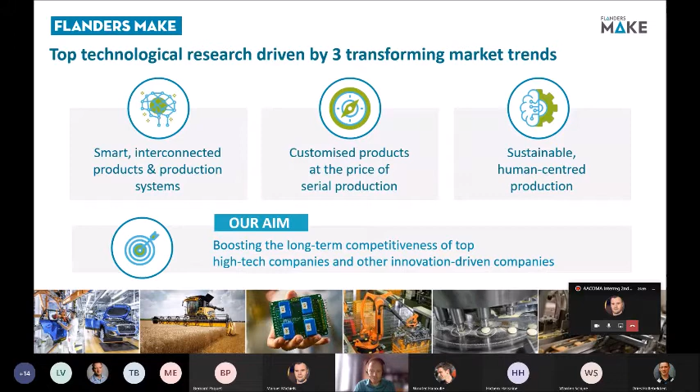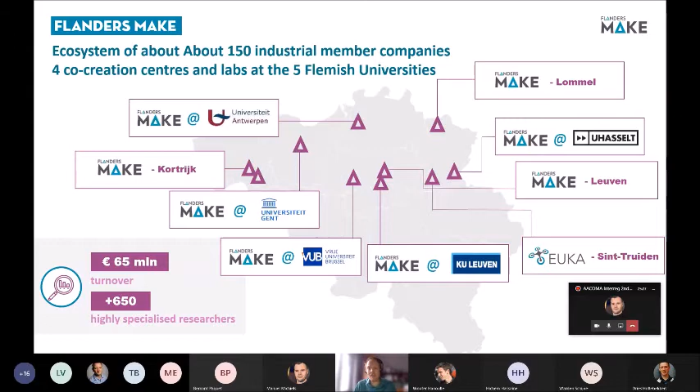The researchers of Flanders Make are about 650 specialized people, spread all over Flanders. We have 4 co-creation sites focused on vehicles, drones, production systems, and machinery. The 5 Flemish universities are associated, meaning certain research groups are strategically aligned with the roadmap of Flanders Make.

Together, we do research in 4 competences. The first is decision and control, to increase intelligence in systems, products and production systems. The second track is design and optimization, to speed up design processes, make them more multidisciplinary, and facilitate an exchange of information in order to cope with complex design problems and product variability.

The third research track is called motion products and has to do with making drivetrain systems, whether they are for vehicles, machines, or flying objects, to make them more energy efficient, more performant, but also more autonomous. And this requires drastic changes in their system architectures.

The last research track is about flexible assembly, in order to facilitate the creation of flexible production systems in which robotics, digitization, automation, and operators go hand in hand to create a flexible environment where easy reconfiguration is facilitated.

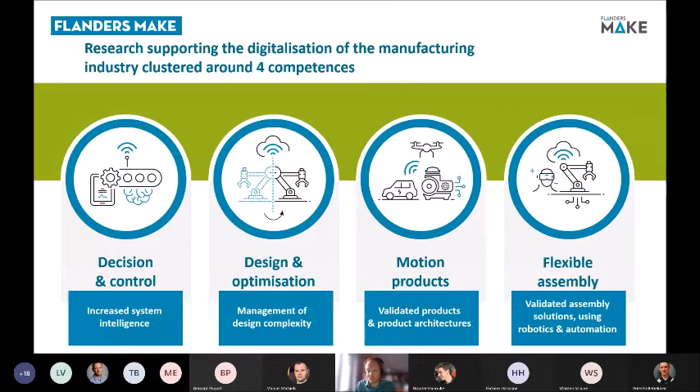Specifically for the AACOMA project, the research team of the circular joining technology is involved. They're working in the joining and materials lab located in Lommel.

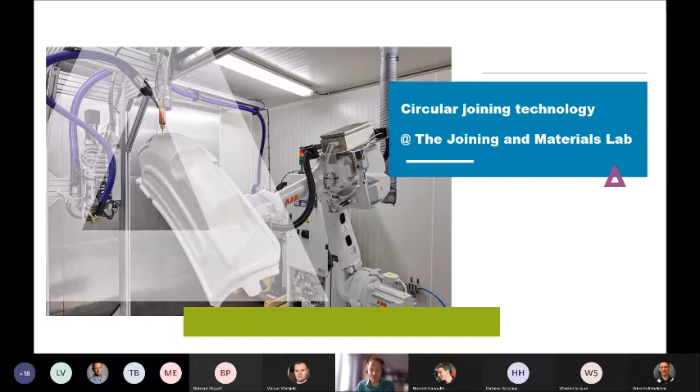So in this lab, we have a set of core competences we are developing. The first one is with respect to the selection and design of joints for multi-material products, where we have expertise in design and selection of adhesives, but also expertise in modeling these systems and evaluating performance.

The second core expertise is to test and validate the designed products and their production systems. Thirdly, in order to make the production systems, we want to deploy Industry 4.0 technologies with respect to automation, robotics, digitization, and to support operators in these production environments.

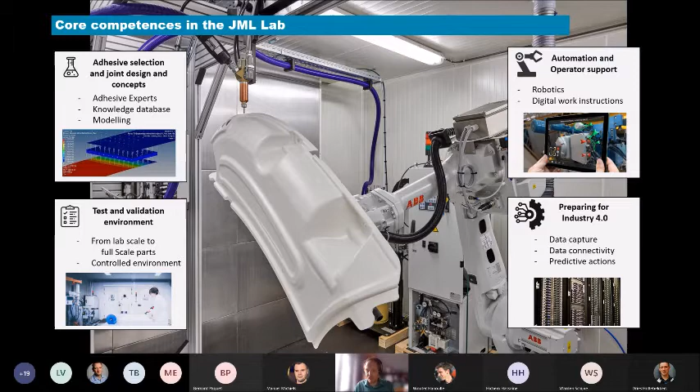And that's then also the fourth expertise: preparing for Industry 4.0. It is capturing data about the product over their entire life cycle, and also during production, to gather these data in a structured way and to deploy them to retrieve predictive actions to improve production settings and to improve the product performances.

The joining and materials infrastructure is unique. It offers the possibility to prototype products, advanced products, multi-material products, and their production systems.

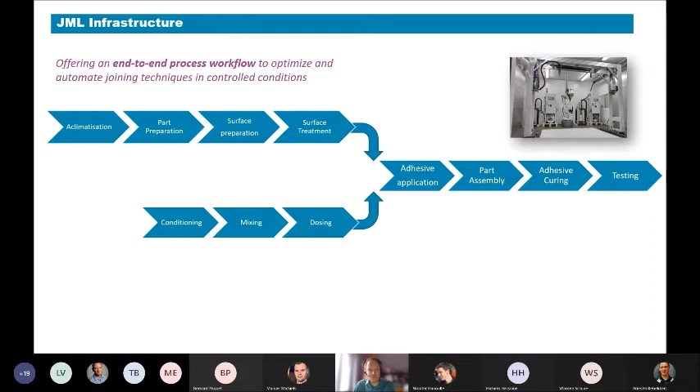So we have equipment that covers the entire production chain of multi-material joint products, going from acclimatization to surface treatments to application of adhesives, curing, and finally the testing. And in this equipment, we deploy, where possible, robots and cobots.

We have dedicated equipment to test the final functionality and performances of a product in climatized conditions and under dynamic conditions. And during this whole process, we capture data in order to monitor product performances and production system performances.

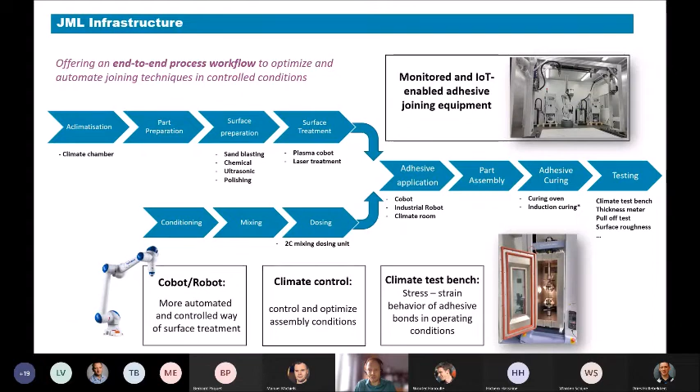In the following video, you will see some examples of activities of our labs towards production and improvement of composite products.

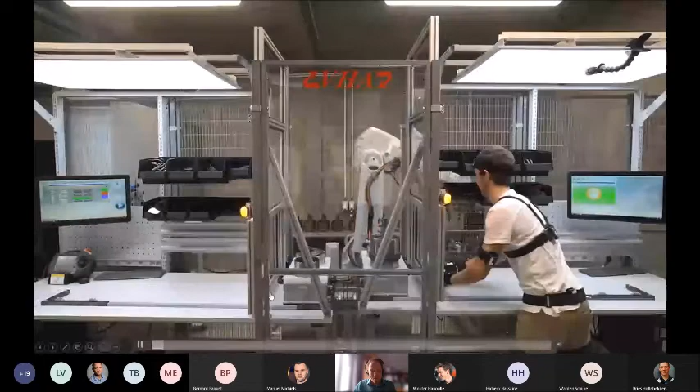Maarten? Yes. The audio is not coming through yet. Okay, a second. Apologies.

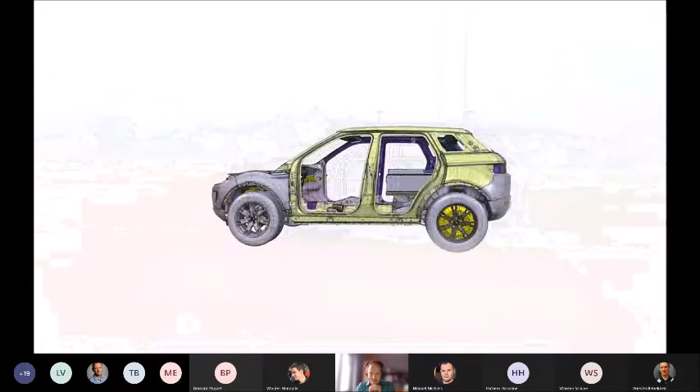Should be better now. Flanders Make is the strategic research center for the manufacturing industry. We look at industrial problems and we analyze them, break them down into engineering practices. We really offer the end-to-end chain from software engineering and modeling all the way into product validation, product testing to help the industry. One of the key research domains is composite materials.

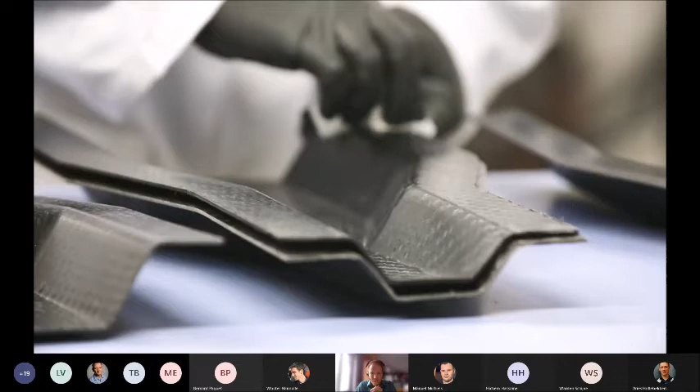Because they offer great stiffness for a low weight ratio, this makes a lot of applications very interesting. Think about fuel efficiency in industries like automotive and aerospace.

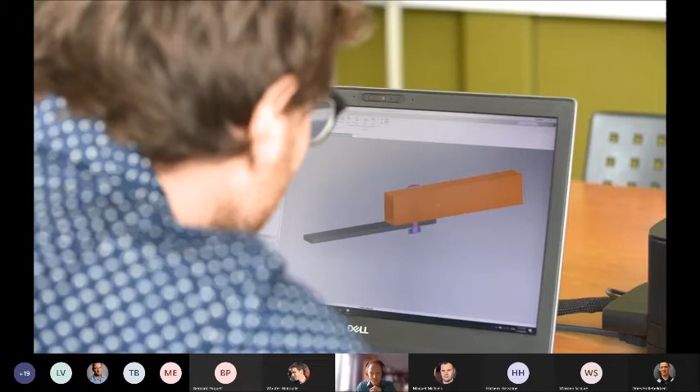After often starting on paper, designs are quickly transformed into computer models. And what we are doing specifically in Flanders Make is try to develop simplified modelings thanks to optimization techniques, and with that getting results in a much lower time frame that are accurate and that can be applied to the full-scale model. For a single joint application that we have tested at a component level, we can reduce the simulation time from 15 minutes to 15 seconds with our methods and our optimization algorithms.

Once a composite part is in production, handling it can prove quite challenging. Machining composites is a complex process because of the nature of composite panels themselves. They are formed by fibers that can easily delaminate. Delamination is a serious threat to quality in the aerospace industry, where large panels need to be joined together.

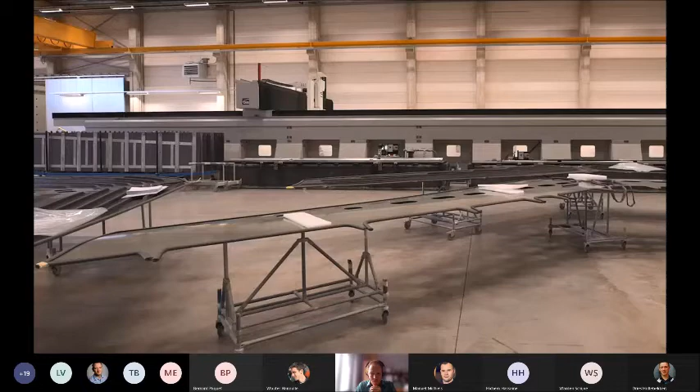We are speaking here about panels that can go in the order of magnitudes of 20 meters long and with 5 millimeter thickness, very thin. Machining this kind of composite panels is very complex because they need to be stabilized. Currently, this requires large and costly fixtures.

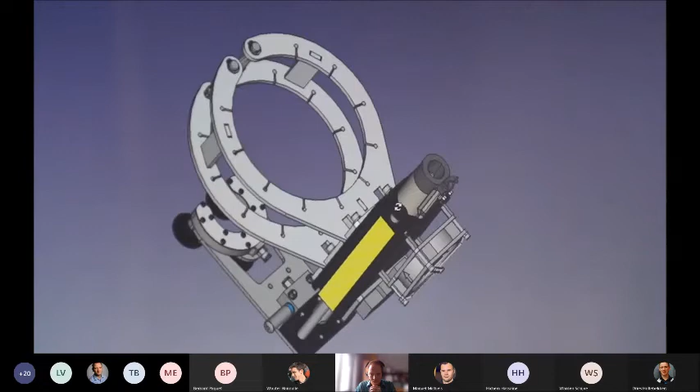Flanders Make has patented a handy add-on solution called Smart Clamp. The results we achieve with Smart Clamp is reduction of delamination. In some applications we reach more than 70% improvement in quality.

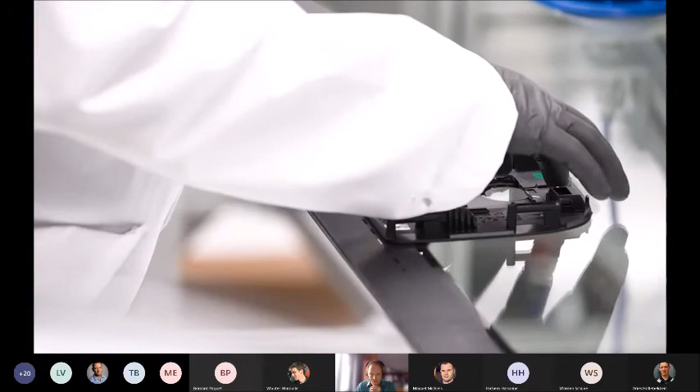Another way of joining composite parts is by using adhesives. Due to their interesting properties, they're able to withstand vibrations and completely seal the assembly. And this is where we come in as joining and materials lab.

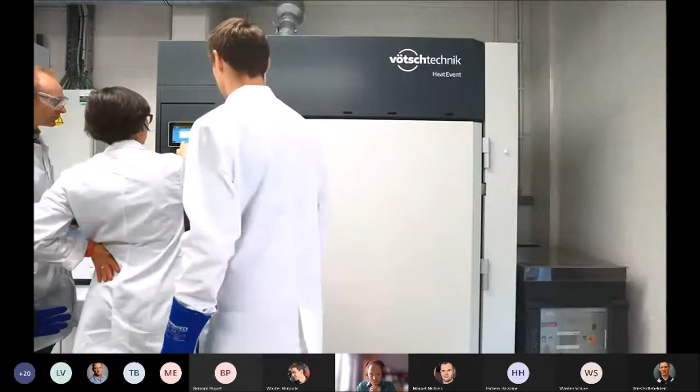So in our lab, we have all the necessary testing facilities to map the right process parameters for the adhesive bonding process. So we have a climate room where we can control the temperature and humidity conditions, and we can test and manipulate parts that are as large as 1.5 meters in size.

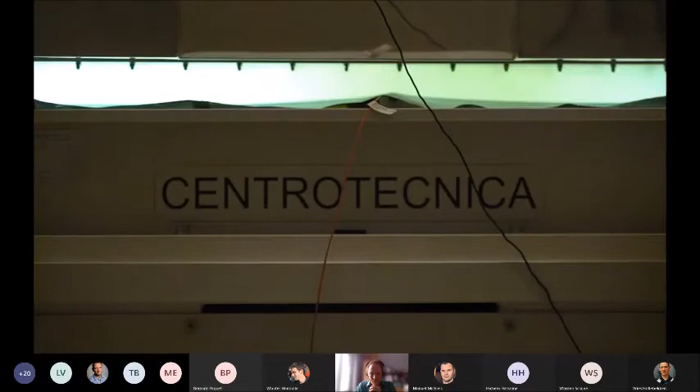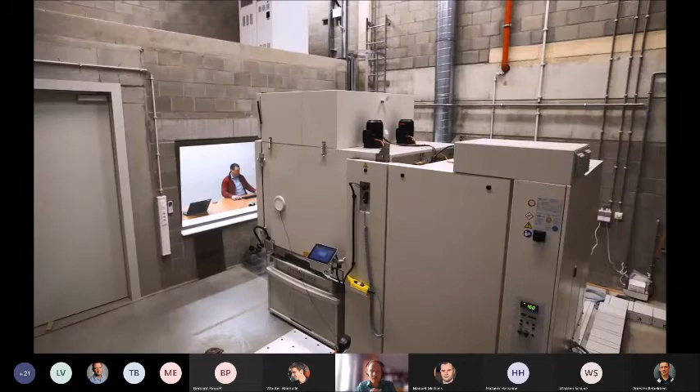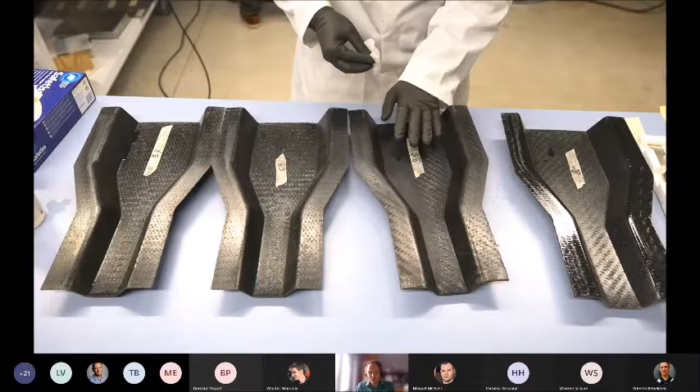Extensive research enables the Joining and Materials Lab to vastly accelerate the curing and bonding process, among other things. We try to make adhesives debondable by not changing much of the chemistry, but just changing the process parameters and using special particles or additives inside the adhesive so that we can debond it with external stimuli like electricity or magnetic fields.

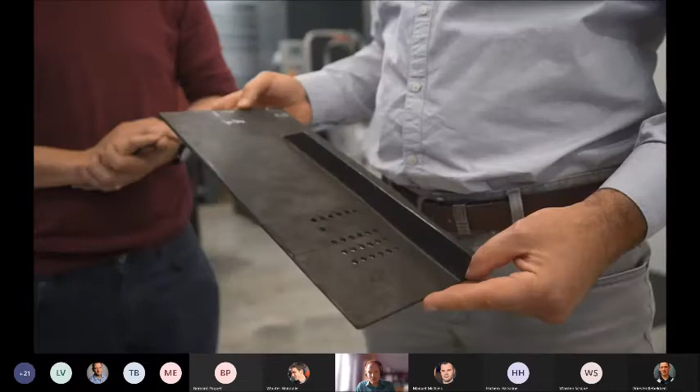Ranging from virtual product optimization, to various assembly mechanisms, to full product testing, Flanders Make offers a broad set of innovative facilities and competencies to boost applications with composite materials. If companies have a question about composite materials or need expertise, they can always go to our website, flandersmake.be, for more information.

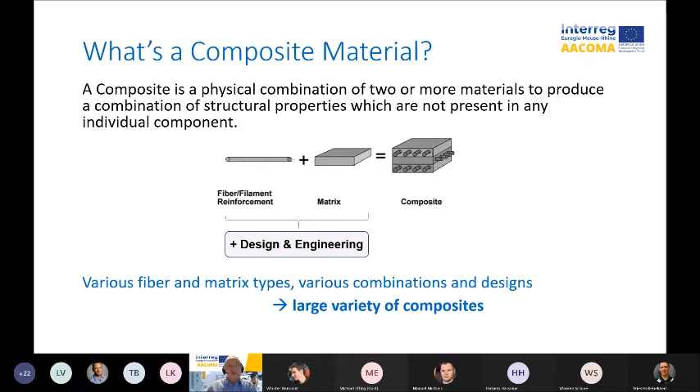Some properties of composite materials are surely the high strength to weight ratio that leads to fuel savings in sectors like automotive, aeronautic and transport, or to reduce the inertia of pieces and reduce stress on fast moving parts, for example in the energy sector for windmills.

Tailored reinforcements are possible following requirements so that you can adapt mechanical properties. You can also achieve smooth and free shapes that give you big flexibility for designing parts. It's also possible to design complex shapes, and they can be produced by additive manufacturing. Complex shapes can reduce the part count and cost reduction in assembling.

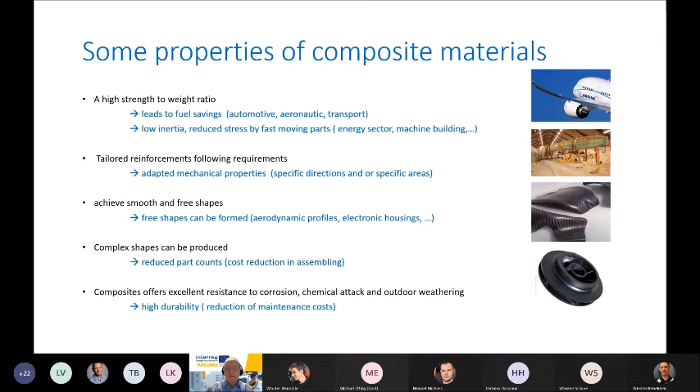Composites also offer excellent resistance to corrosion, chemical attack, and outdoor weathering, so that you can have high durability of your product and reduce maintenance cost. So these are some interesting properties that can be used in any sector.

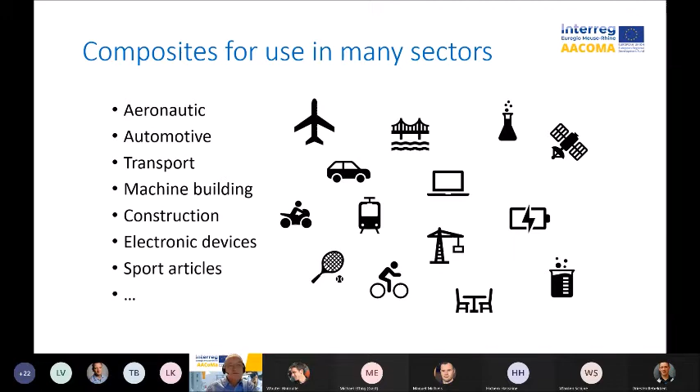In the last decades, mainly the aeronautic sector used most composites, and today modern airplanes have up to 50% of material in composites. But other sectors can use composite materials too, so that gives an opportunity for many sectors.

So why this project? It is to innovate material design and advanced manufacturing of composites and to provide large opportunities for SMEs, mainly from any sectors. New materials such as composites can make their way to a wide range of sectors, and we noted a general need for knowledge about composites is awaited by companies. So this project will also minimize risk for SMEs before investing in expertise, skills, human resources, demonstrations, and testing.

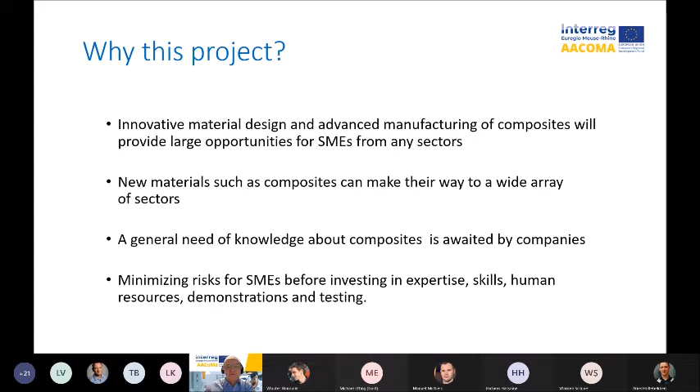Opportunity for companies is evident because we try to accelerate the use of composite material for product innovations. Companies can implement innovative manufacturing technologies and materials and also use sustainable composite materials.

So the objectives are clear: to accelerate advanced manufacturing of composites. We will do that by communication and strong networking, showing proof of concepts and inspiring companies for new projects after this one. By this objective, we will promote the Euregio Meuse-Rhine as a hotspot for composite manufacturing.

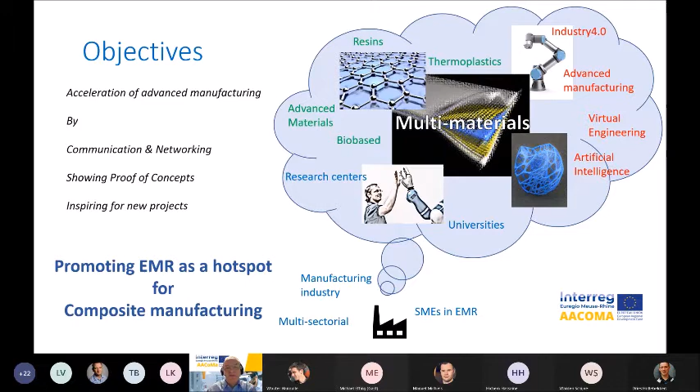The project AACOMA has a total budget of nearly 3 million euros, and 50% are funded by the Interreg program Euregio Meuse-Rhine. We also obtain co-financing from regional authorities.

So the consortium is composed of partners from the Euregio Meuse-Rhine. First is Flanders Make, the strategic research center for the manufacturing industry situated in Lommel, Belgium. Then we have Fontys University of Applied Science in Eindhoven. We have the Institute of Bio-Based Materials at the University of Maastricht, situated in Geleen. The AMAC company is an industrial and business consulting company in the field of lightweight construction materials situated in Aachen.

Then we have also the Department of Aerospace Mechanical Engineering of the University of Liège in Belgium. We have the Technologic Research Center with the Product Hub Development Department, Sirris, in Belgium. And also, at least, Centexbel, a competence center for textile and plastics, and we are in charge of the lead of this project.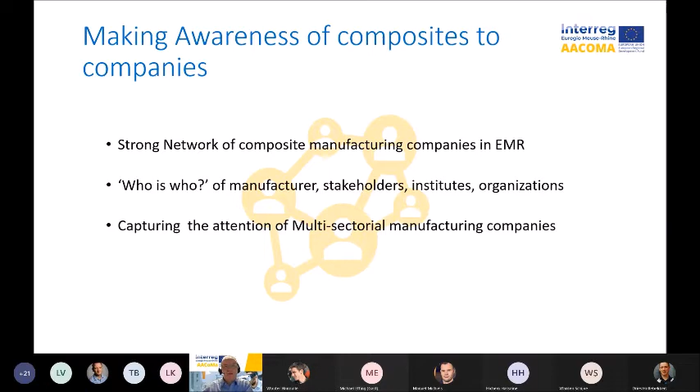And we try to capture the attention of multi-sectoral manufacturing companies. We will do that through roadshows, network events, and trainings. Today we have the second roadshow started here by Flanders Make in Lommel. I will attract attention for other events that will take place this year.

A training is foreseen about basics of composites. It will be organized on 9/12. And early next year, we will have the AACOMA public kick-off event that will be organized on 25 February. Probably this will also be a virtual event.

So who is who? The creation of a common database of the composite community will reinforce networking, and we will build up a living community of companies, institutes, universities, organizations. This is a possibility to make you visible on the AACOMA website, to be visible to the composite community. Therefore, you can contact our communication responsible, Mona Ziegler.

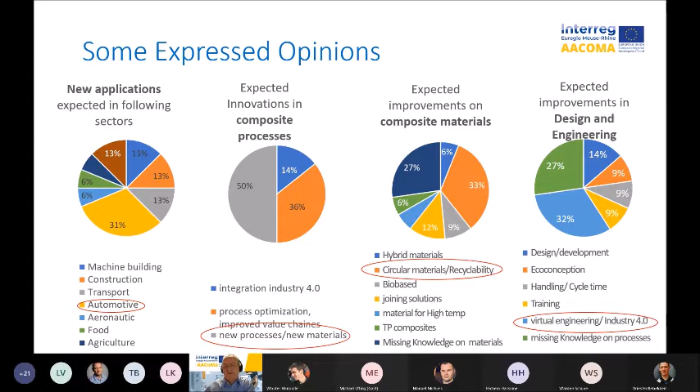Here are some expressed opinions from the last matchmaking that we organized in September. In this matchmaking, most participants came from the automotive industry, and new applications are expected mainly in this sector. Composite process expectations are mainly for new processes and new materials. Composite material expectations are mainly for circular materials and recyclability. And in the domain of design and engineering, the main interest is for virtual engineering and Industry 4.0 implementations.

So we are also starting to develop a series of demonstrators. The aim is to address some technology challenges, to make a proof of concept that we will show through these demonstrators, to make an evaluation of these demonstrators, and to disseminate finally the lessons learned.

We target five thematics for these demonstrators. One will be in relation with graphene-based composite materials, one with hybrid yarns for new manufacturing processes. One will touch on composite repair, one for biomaterials, and the last one will target robotics and cobotics in composite manufacturing. So also for these demonstrators, you can give us your advice and your opinions.

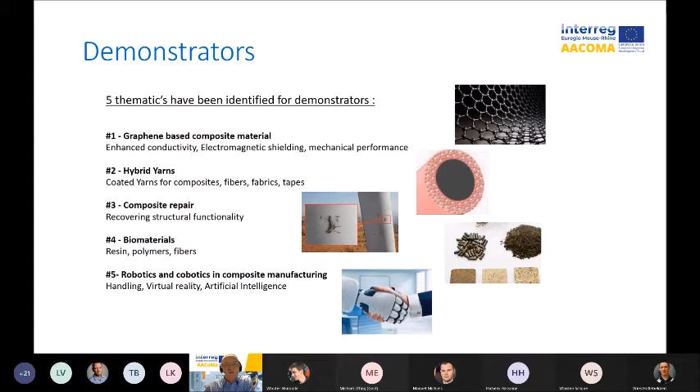Then the last point will be sustainability actions for the future. Therefore, we will set up guidelines for advanced manufacturing of composites, inspiring you for follow-up projects with companies or between companies and institutes.

So I come to the end. We will soon implement the AACOMA website. It is foreseen to have it online in the next week. I will give you here a first impression of what it will look like.

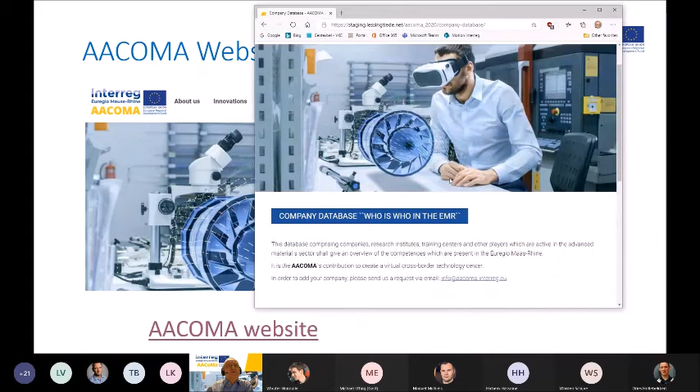So here you have an overview of the AACOMA website. The aim is that we will keep in contact with you, that you can inform yourself about the project progress. You will be informed about the innovations made by the demonstrators. You will have the possibility to be part of the who is who in the Euregio. So please contact us so that we can add your company here in this database and make you visible, so that you can show your own activities, but you can also find companies of interest for cooperation in future projects.

Then you can have a look here on the advisory board that is actually started. And finally, you have also access to training activities, events, and news that are ongoing in the AACOMA project.

Here I will end now my presentation. I thank you for your attention and I'm open for further questions. Thank you.

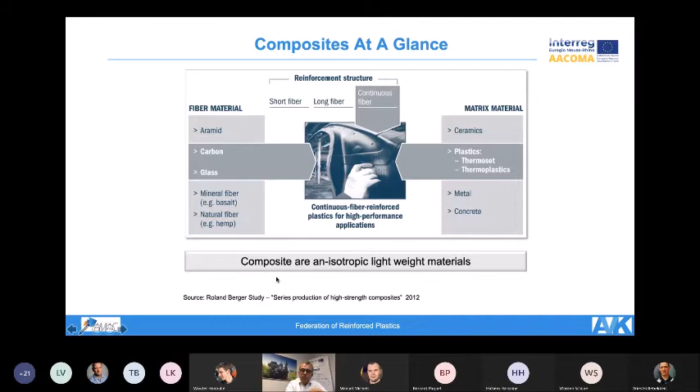Bernard Paquet already highlighted the objective of our project. It's important to highlight that the area around the three-country corner between Germany, Netherlands, and Belgium is a hotspot for composites, for electromobility, and for automotive. We had a similar project, Interreg Lightweight 2025, which will reach completion by the middle of next year, even in e-mobility - not only with the StreetScooter in Aachen and the e.GO Mobile, but also with a lot of suppliers to this industry in the Netherlands and Belgium. We have a hotspot here for the automotive segment, and I'm very pleased that Ford is also part of our advisory board, Ford here in Aachen and Cologne.

So we are targeting multi-material systems. We are targeting to connect all the SMEs to the world-class universities and institutes here, and to the research centers that we have in the region.

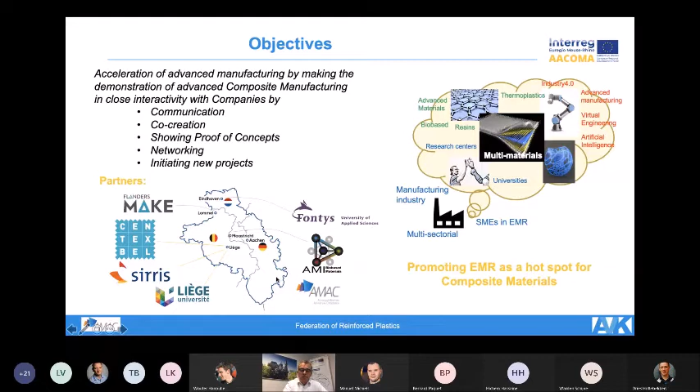The main activities, I think Bernard has mentioned them already. We want to show how we work together, and we are doing this by working on generic demonstrators, and we have identified already the top 5 priorities for us, which you have seen.

Important is also composites in general. It's a top technology and top industry for Europe, especially for high-wage countries. There is a lot of funding going on, not only in Germany with the University of Technology in Aachen, but also around us, so that this technology should not move away to Asia or other parts. It's very important that we try to find processes, technology, and know-how that stays within Europe, within our region, and can be defended because of the level of automation, the know-how, and complexity that we can handle here—that makes us different to other parts of the world.

So Europe and the Euregio here is a hotspot. We will have in 2024 in Maastricht the big event on composites, the ECCM, coming up here. And we have events every day around us at the different university campuses.

So it's a key technology for economic growth. You can say that composites are growing normally with 1.5 times the GDP of a country, specifically because we are replacing metal. We are in many industries and markets, so it's an important growth technology, and it's also important for innovation and high performance.

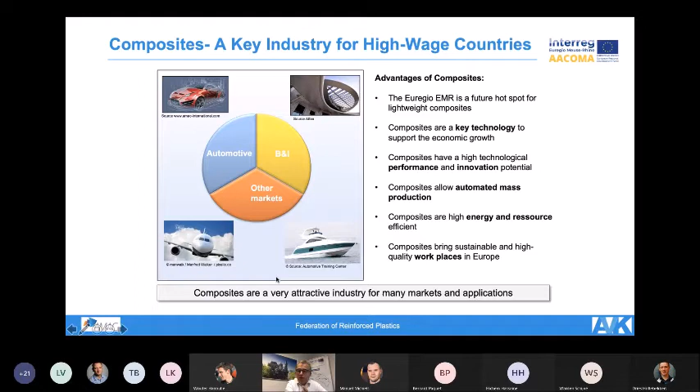Last but not least, we want to maintain and also bring new workplaces to Europe that are sustainable and high quality. That's also not only the aim of this project, but also of the trade associations we are dealing with, like AVK or Composites Germany.

So let me talk now about trends in the automotive industry, taking the example of lessons learned from the BMW project. For most of us, in 2012 the project on the i3 was really the hype for the composite market.

Specifically the word 'carbon composite' triggered a lot in the industry. This car, the i3, produced in Leipzig, Germany, has a so-called Life module completely out of carbon fiber composites, and the drive module—the bottom part with the batteries—is completely made with aluminum. So it's really a full solution on the composite part.

The company BMW and the Quandt family behind it really made a big effort to bring everything in-house, starting from recruiting 500 of the top experts from the industry and transforming them into automotive experts. They recruited from the aerospace industry, the materials industry, and many others, and put them really into the automotive environment, developing all the technologies needed to make this module.

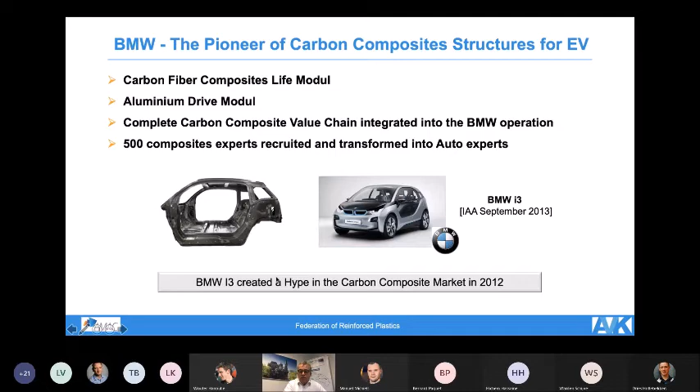Before describing the steps, let me highlight what happened there. BMW decided to have carbon fiber production in-house, implemented in North America in Washington State, making the carbon fiber. Then the carbon fiber weaving and pre-pregging was done in Germany near Landshut, and the final manufacturing and construction was done in the Leipzig plant—a brand new plant built there—which was then completely integrated into the full assembly process of making the BMW i3.

The story behind it was really the effort to show that weight savings need to be realized, because the conventional model would have been 1,380 kilograms, and by using carbon fiber material it was possible to reduce the weight by 30%. The batteries alone will weigh more than 500 kilograms on this car, so there was a need to show lightweighting. By reducing 30% of the weight, that leads also to a significant CO2 reduction and a significant reduction in fuel consumption.

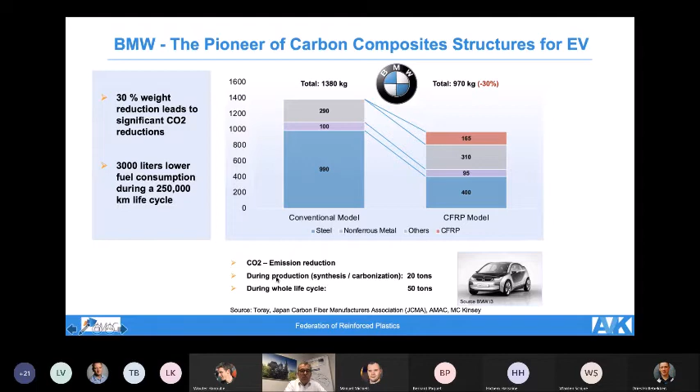So more than 3,000 liters less in terms of fuel throughout the life cycle of a car. And in terms of CO2 footprint reduction, in production 20 tons, and maybe during the whole life cycle 50 tons of CO2 could be reduced. And that was, of course, an important story to document what composites can do for automotive.

The life module was made using thermoset processes: RTM parts, monolithic RTM, and wet pressing process. Not super sophisticated processes, but controllable ones. 34 parts were made, molded, glued, and assembled together. This was a great effort by the industry, and was really done on time.

The good news is also the build rate of cars. Initially, they started at maybe 20,000 per year, and in the first two years it was difficult to get there. But the build rate is now up to more than 40,000 due to additional funding. And the good news is that BMW decided to extend this model until the year 2024, so it will be a 12-year life cycle for this vehicle.

Initially, people were questioning the cost, but I think it's shown BMW being a leader for electrical composite vehicles.

Of course, there were issues. There were issues in terms of waste. Normally, for 20,000 units per year, there's 1,000 tons of carbon fiber waste that has to be recycled. There was a recycling stream developed by BMW and several companies, chemical companies, in the nonwovens market as well as the plastics market. So it can be completely reused in a different form, but it can be reduced.

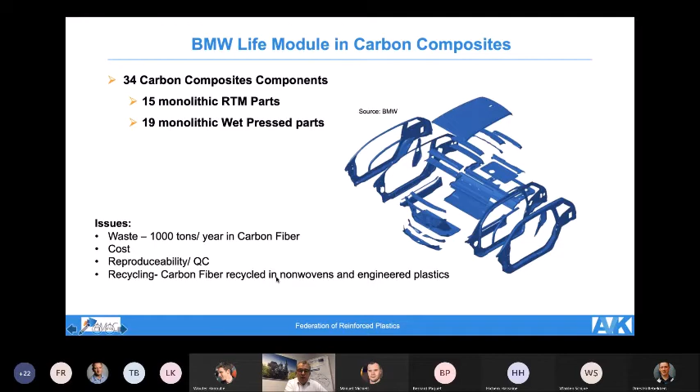Of course, the cost of carbon fiber has not come down as expected, and it will not, because it depends on the high cost of the precursor, etc. So that is definitely there. And of course, the reproducibility to produce day in, day out, through winter and summer, different climates, a good product—that has been a challenge.

So what were the lessons learned from this project? I think there is a need for cost-efficient materials, and a need for more cost-efficient processes. There should be no scrap, or minimum scrap, so we cannot just trim off material that is expensive. Processes have to be very robust, day in, day out, and of course recycling is needed, and cycle times of a few minutes are needed.

So I think the learning from BMW is that they will continue with carbon composites in cars, but more for high-end cars. Actually, the new BMW 7 Series has more composites in it than the i3. The total volume of the BMW 7 Series is already more than 100,000 units per year, so the consumption of carbon fiber composites by the 7 Series is higher than on the i3.

But BMW is, of course, looking also into more multi-material systems, and is favoring a lot of thermoplastic materials for the future. So we'll see the next generation be a hybrid solution between metals, composites, and composites with maybe glass fibers and more thermoplastics that we've seen. But still, lightweight is the way to go, and there's no question that composites have to be used.

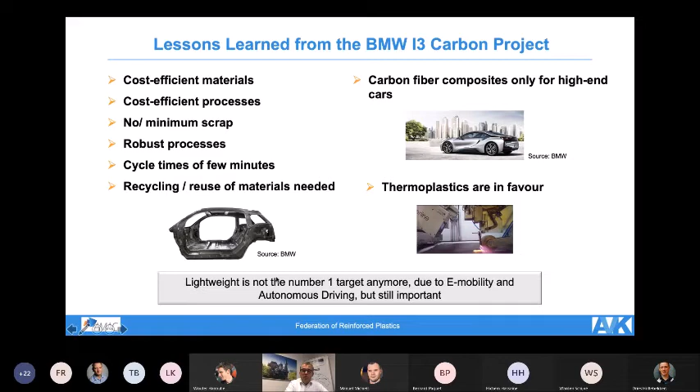In terms of further cost reduction, different people were looking into this. There was already a study made many years ago by Roland Berger, and the main point is that this industry is very fragmented, with a lot of process steps in between that add cost. Therefore, BMW brought everything in-house, so that you're not adding margin by margin from one company to the next, but make the fiber in-house, the textile products in-house, and the finished part.

The main discussion is that in production methods, a lot of cost saving is possible through automation and near net shape preforms, etc. Whereas in the field of glass fibers or resin, it will be very difficult because the prices are already very much down. These are high volume parts of millions of tons per year, like glass fiber, and there's a certain level there.

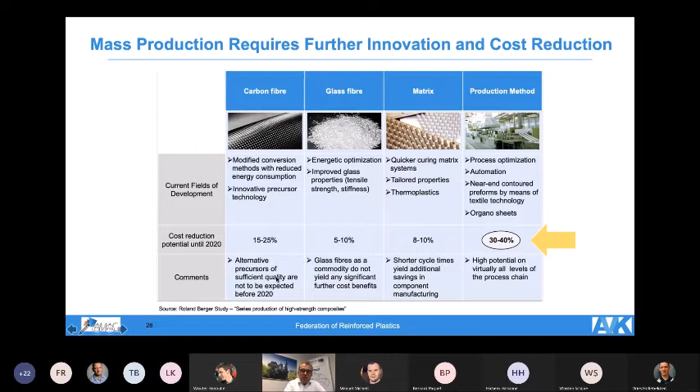On carbon fiber, a reduction of another 15 to 25% was expected, which did not happen, because there is not enough capacity on carbon fiber for high-end applications. Therefore, the aerospace grades and the windmill grades are selling at a higher price, so we don't expect a significant reduction on carbon fiber in the short term.

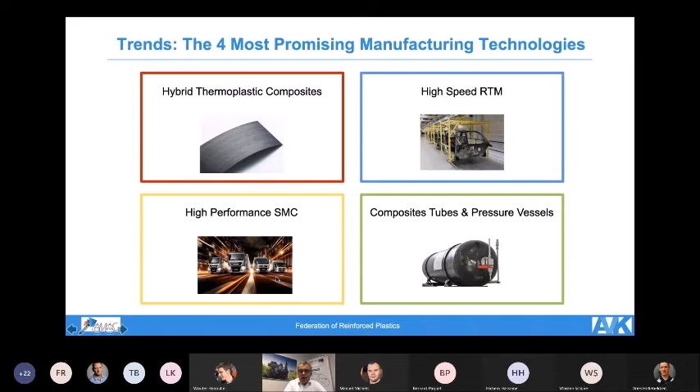Out of that, in discussion with the automotive industry, four most promising manufacturing technologies were highlighted that will be investigated more, and you will see them more in future vehicles. One is hybrid thermoplastic composites, then high-speed RTM, high-performance SMC maybe together with carbon fiber use, and then filament winding of pressure vessels, like those for hydrogen, maybe in thermoset initially and maybe thermoplastic in the future. I want to highlight each with one slide.

Very fast growing, from a smaller base, is the hybrid thermoplastic composite market, where you can have organo sheets or tapes as an insert in the molding process. It can be over-molded or combined with LFT or GMT. I think this is a way to go.

We had just yesterday a webinar together with a German supplier of organo sheets, Profol in Eastern Germany, who has invested 20 million euros in a new production line for this technology. So this is coming from a smaller base, but it is definitely growing. The Ford Focus door was a good example.

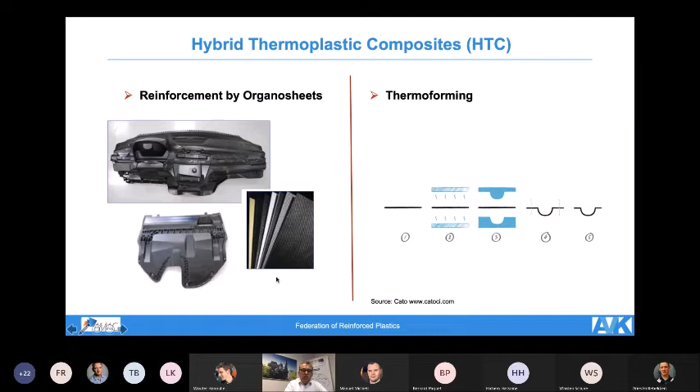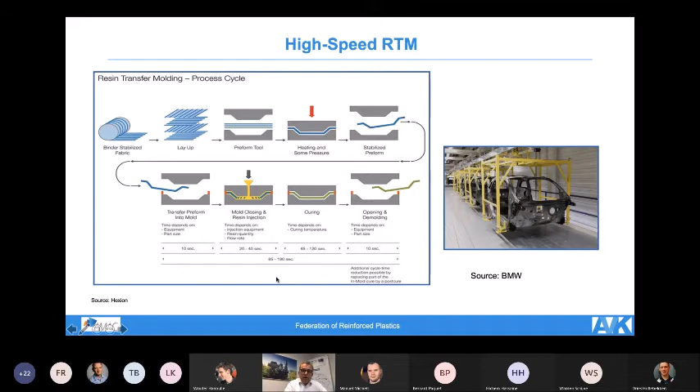Another thing is high-speed RTM. This is basically the production line installed at BMW in Leipzig, which will be optimized with preform handling, automation, etc., and less scrap and faster resin. So that's another route to go.

SMC: all the major SMC producers are working with a high-performance SMC using at least a portion of carbon fiber, or even carbon fiber waste, etc., and bringing this back.

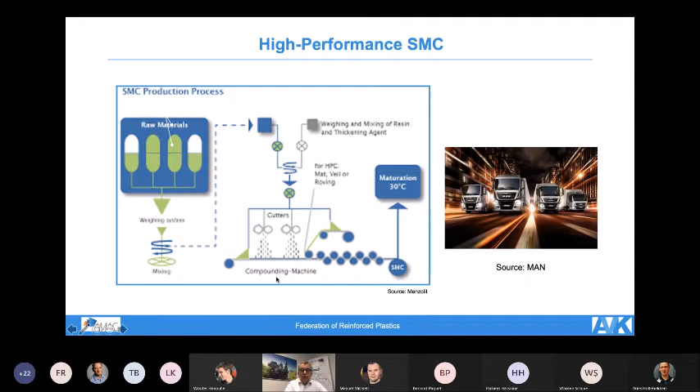Last but not least, pressure vessels. This could be the so-called killer application in the market. The carbon fiber production for pressure vessels has to be increased a lot if things come through.

We had in one of our interregional projects, also across borders, the company Plastic Omnium in Belgium and AMS and a few other companies involved. The forecast is that if only 2% of vehicles by 2030 will be fuel cell driven, and they need pressure vessels with hydrogen, it has to be carbon fiber. Then today's carbon fiber production has to be tripled just to overcome that. So that's a big challenge.

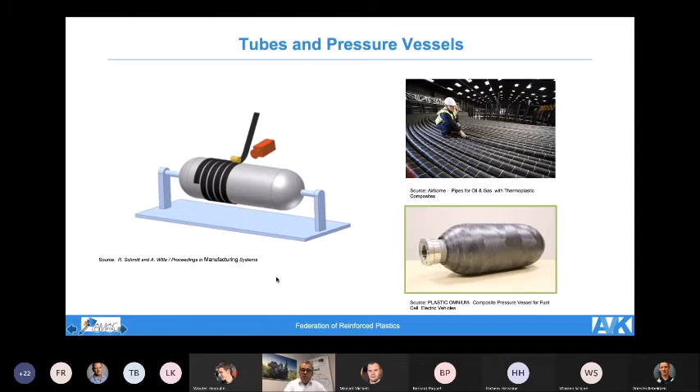There was a big announcement by Plastic Omnium that they will go this way and will be the market leader in the future. So this is definitely a technology today in thermoset, which might also be open for thermoplastic in the future. These are my extracts and trends from the composite industry, mainly for automotive.

I'm not sure, Manuel or whoever looks at the questions, do we have any questions so far? No, we don't have any questions in the chat. No question, okay, sorry, my microphone was still muted. No, we don't have any questions in the chat yet, but maybe someone in the audience would like to ask a question at this moment, if there's an opportunity.

If not, I see my colleague Elmar Witten. Elmar Witten is the managing director of the AVK, the oldest trade association, founded in the 1920s in Germany, so almost 100 years old. The AVK publishes market reports about application, technology, and region. I'll give the word to Elmar to give the latest report to the audience.

Yes, okay, thank you very much, Michael. If you handle my slides, it will not be possible that I need too much time, because Michael is switching from slide to slide. Can you start with the first one, please? I still see... one second, does it work? Does not go on. It works. Okay, whatever we did. So I cannot go on mute, so I will be silent. Okay, thank you very much.

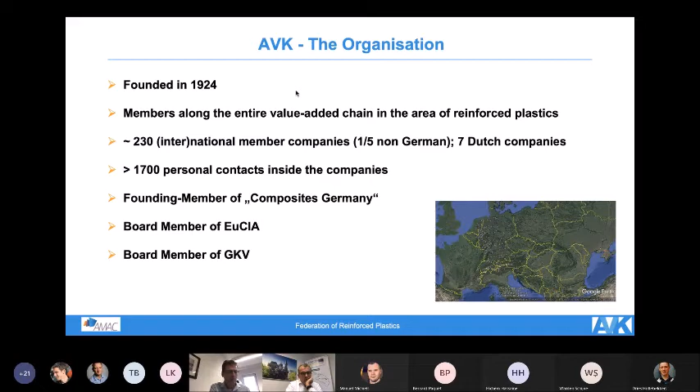So just a few words about our organization, but what I'd like to tell you more in detail is about the trends and development of the GRP market. GRP is the glass fiber reinforced plastics segment of the composites industry.

Michael already showed some very interesting trends in the industry, mostly driven by carbon fibers for high-end applications. But we shouldn't forget that most of the material in the market, in terms of volume, 95%, is reinforced with glass. The carbon fiber market in total is around 1% of the whole composites market. We're talking about 10 to 12 million tons of composites materials produced worldwide, and the amount of carbon fiber reinforced plastics is around 100 to 150,000 tons. So 1%, while 95% of composites material is made of glass fiber.

If we look at the development in Europe, we've surveyed the production of glass fiber reinforced plastics in Europe for decades through the AVK. You see a development which is increasing and decreasing - I'll come to the reasons later. In 2020, mainly due to the Corona crisis, we see a decrease in production of glass fiber reinforced plastics in Europe of around 10 to 12%. The total production amount is 1 million tons of material.

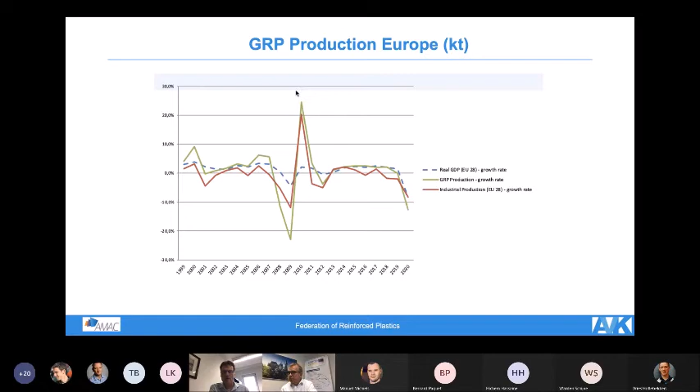That's maybe not surprising, because the main application areas for composite material, especially glass fiber reinforced plastics, are the transport sector and construction sector, each with nearly a third of the amount. That means if the construction sector is declining in Europe, production of glass fiber reinforced plastics used for construction is also declining, and the same applies for the transport sector. So we're developing similarly to the general economic development in Europe and in the individual countries.

The application areas for glass fiber reinforced plastics are, as I said, a little more than a third for construction and infrastructure - that's the blue field - and nearly a third for the transport sector, which includes all kinds of vehicles: cars, but also planes, ships, and so on. In recent years these areas haven't changed much, but the construction sector is now a little bigger than the transport sector, which is the first time - it switched two years ago. So the construction and infrastructure sector for glass fiber reinforced plastics is now a little bigger than the transport sector. Then we have the sports and leisure sector and the electronic goods sector made of glass fiber reinforced plastics.

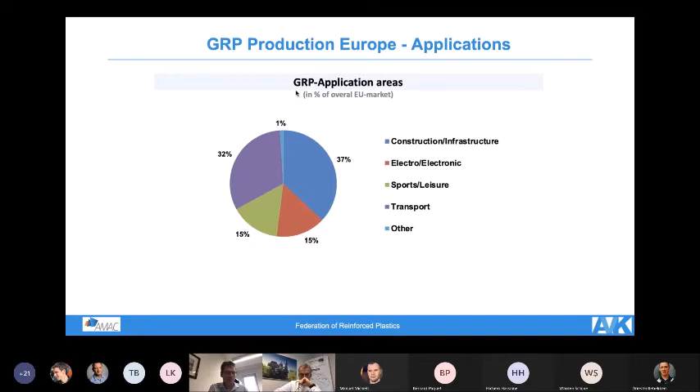If we go more into detail - I won't explain this table fully now - but you see we have to divide the production referring to the different material classes that are used.

You see here in the first lines we have the production of SMC, BMC material. Michael already refers to this material class. Then we have the open mold techniques, this is hand lay up and spray up techniques. Then we have the RTM technology. Then we have the so-called continuous processing techniques, the production of sheets and the pultrusion process. And we have the production of pipes and tanks, either with filament winding or centrifugal casting processing techniques. And then we have GMT and LFT.

So what you see here is the first processes: SMC, BMC, open mold, RTM, continuous processing, and pipes and tanks are all materials with a thermoset matrix. And the only thermoplastic material in our figures is LFT and GMT. So we are not having a closer look at all kinds of short fiber reinforced thermoplastics, which is of course also a very interesting and a very huge market. But our definition of the glass fiber reinforced plastics is all kinds of thermoset material reinforced with glass, and thermoplastic material with long fibers, GMT and endless fiber reinforced thermoplastics.

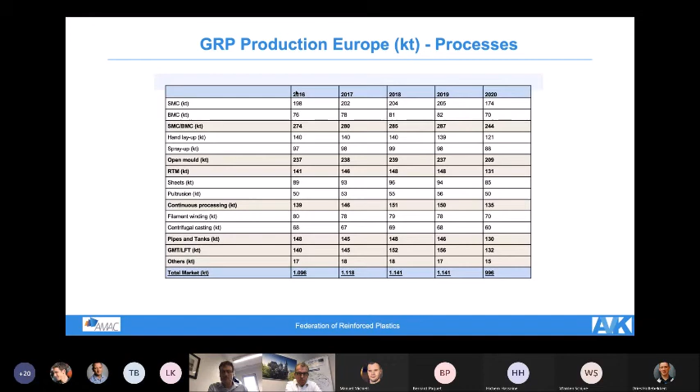Yeah, and if we have now a look at the amount of production, you see that SMC BMC is still 1/4 of the production in Europe of glass fiber reinforced plastics. Still 21% is made with open mold techniques, so hand lay up and spray up. These are in each of the European countries the very small companies which are still working with non-automated processes, but who also produce parts and will produce parts in the next years.

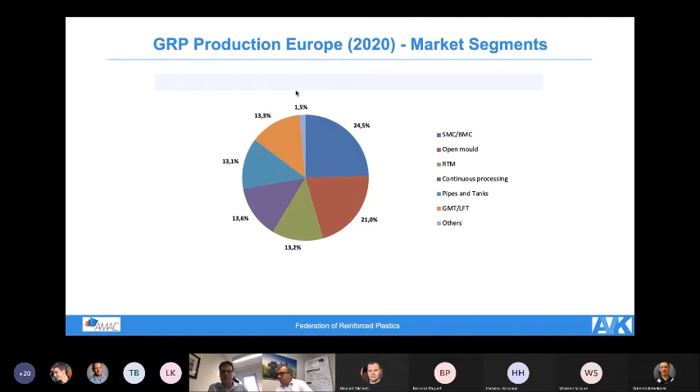We have the RTM technique with 13%. We have continuous processing, pipes and tanks, and in the left corner at the top you see the amount of LFT and GMT material. And if we have a little closer look at the development of the thermoplastic material, LFT and GMT, Michael, can you switch to the next?

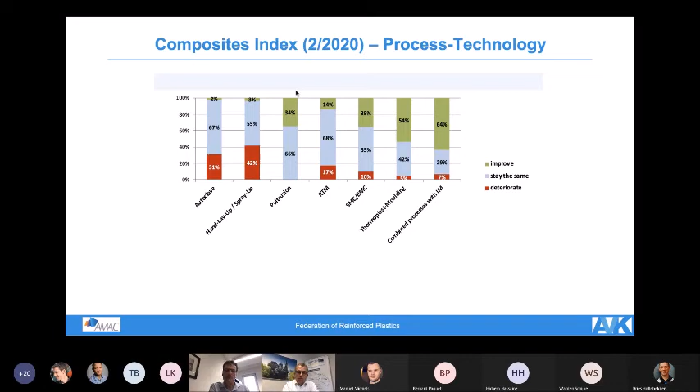And very positive views are also for the SMC BMC segment. 35% say that this segment will improve, not at least due to what Michael already mentioned, new developments of high performance SMC, for example.

Okay, the next closer view we have to do is not only looking at the different processing techniques and applications, we also have to have a closer look at the different countries in Europe, because the development in each of the countries is very different. You see here that a little more than 10 years ago, the biggest countries in terms of production of GRP material were Spain and Portugal, with more than 250,000 tons.

And even Italy was bigger in terms of production than Germany a little more than 10 years ago. But with the economic and finance crisis in 2008 and 2009, there was a very big decrease in production volume, especially in the Southern Europe countries. Germany didn't suffer so much in these times and stayed quite well.

And you see that meanwhile, since a few years, Germany, this is the red line here, is the biggest country in Europe in terms of production of glass fiber reinforced plastics. We had a decrease in all of the European countries this year, but the decrease was different. In Germany, we will have a decrease lower than 10%, and we will have a decrease of more than 15% in all of the Southern Europe countries.

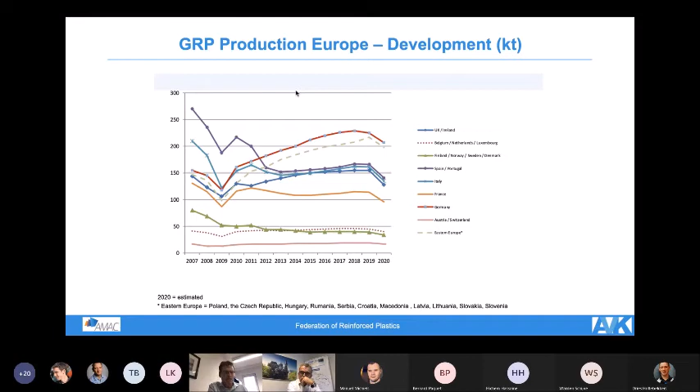Because of course the applications in these countries differ - we are very good in materials used for the transport sector in Germany, and the development depends on the different applications in the different countries. I think the last figure, or nearly the last figure - that is already the last. That is another figure about the development in the countries.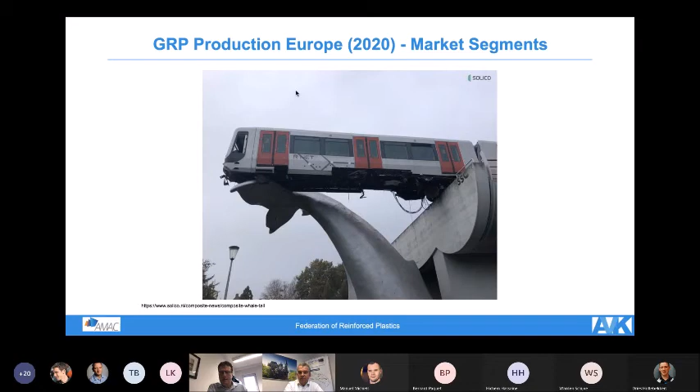So I would like to thank you very much for this short overview of the development of glass fiber reinforced plastics in Europe. And I'm open for all kinds of questions. Thank you very much.

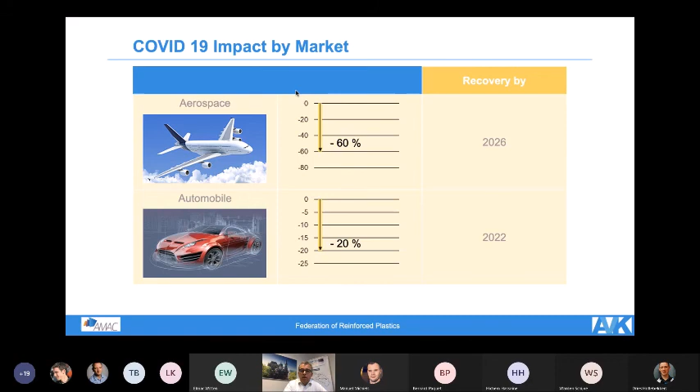For many cars, the traditional cars, the normal cars, maybe a second or third car, a small Fiat, Peugeot, etc., they are more impacted in Germany, and you have the model of company cars. You have a lot of lease contracts, and they continue, so the outlook is not looking bad. The range of models, including plug-in hybrids and electric vehicles, is increasing a lot, and maybe there's a change going on. So I think the outlook for 2021 and 22 is not looking too bad.

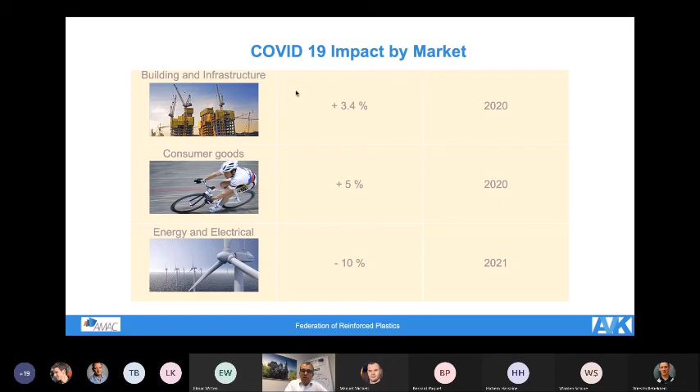Energy, electrical, wind energy for example, that has not too much to do with the crisis. It's more the transition and the availability of new spots for wind turbines, etc. Will come back also next year.

So in terms of the market, you have seen that, and that translates into materials. Thermoplastics suffered less than thermoset, as you have Elmar's numbers, but since some products did quite good, SMC for example is surprisingly doing well. It has to do with the truck industry. A big element is the truck industry, which came back very nicely now due to more Amazon shipments of goods to the people, etc. So small and large trucks are used more.

Recreation vehicles are used more, motorhomes, etc., using maybe a roof from SMC, etc., doing well. On the thermoplastic side, I think GMT, LFT, and also now tape-based products are doing okay, and should come back next year or the year after.

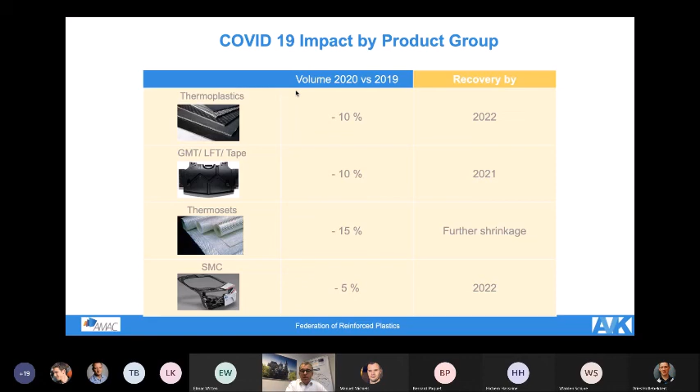And what did this COVID-19 do to us? I think life will be different after COVID-19. It will not be the same. We can see it here, for example, in terms of what we are doing - we do Zoom and video conferencing. Everybody had to do it from one day to the other.

I remember the last company visit I did, March 13th, to Airbus, and then next day we had to do Zoom meetings with everybody. I think video conferencing is a big winner and very efficient. We have this meeting here today by video conferencing, a very cost efficient, time efficient system that everybody can use. Travel, I think, will definitely change - I mentioned that already. Intercontinental travel will maybe cut in half in the future.

Not just for a big meeting going to America or China, but maybe once a year, and going to a trade show, being more focused on video conferencing and phone conferencing. Definitely personal meetings are suffering a lot. This will be a little bit less and we'll use other tools, but it will remain very important.

I think the trade shows are also important. People are suffering that they cannot meet at trade shows. So definitely large trade shows like JEC or Composites for China are very important, and everybody will go there. On smaller regional trade shows, or ones focusing on only one specific subject, that will be less. We have heard that Composites Europe, the trade show, will not continue next year.

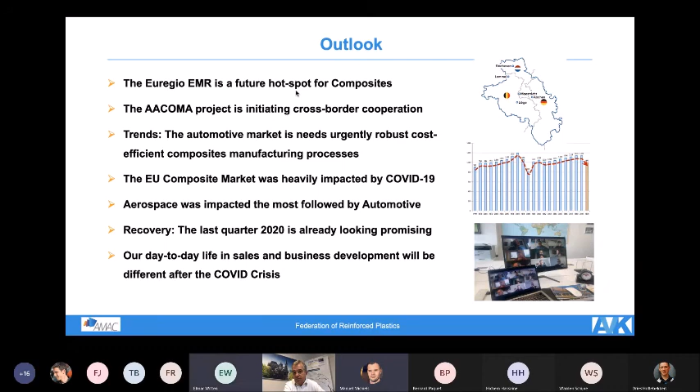Thank you very much for this presentation, Michael and Elmar. We don't have any very specific questions in the list. There is one remark from Martin that indeed repairing of composite structures is a major issue, and DCMC focuses on this issue, and they are looking to reach out to the AACOMA partners to see if we can connect.

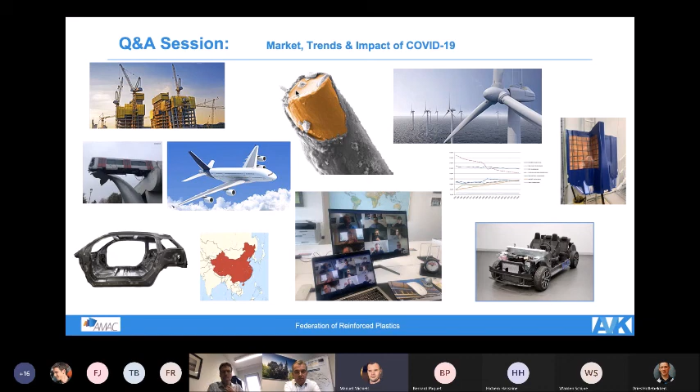As I also already mentioned earlier, Martin, there will be a demonstrator on composite repair. In making these demonstrators, we will of course look at the state of the art and the challenges for these specific demonstrators, including composite repair. So we would very much like to get in contact with you, to get into the details and make the demonstrator even more relevant, and make the research we are doing relevant for the broader industry.